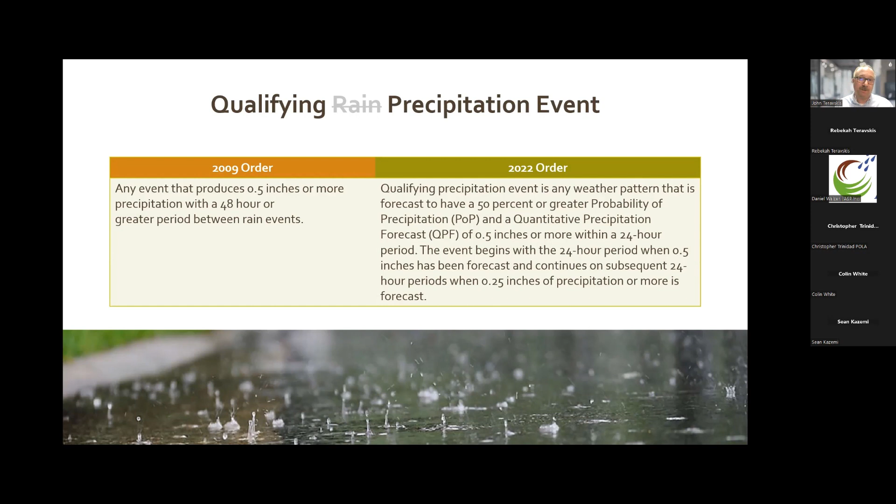Now, I had mentioned previously that in some ways, nothing changed with the monitoring program. And I'll illustrate that to you in a moment. But in other ways, everything changed. And the reason is because of this that you see on the screen, a change in the definition of a qualifying precipitation event. In fact, we kind of changed the term too, right? It used to be in the old permit called a qualifying rain event. Now it's called a qualifying precipitation event. I guess we saw last year that California can indeed get snow. So it's now called a qualifying precipitation event.

And in the 2009 order, you probably were real familiar with how to figure it out, right? You went out to the rain gauge, and if there was a ½ inch or more, then you had a qualifying event. Now, it wasn't in a single day. It was during a stretch of rainy weather that ended with 48 hours of dry weather. So whether it's 1 day or whether it's 30 days, until we get 48 hours of dry weather, the rain event doesn't end. And then we measure the accumulation of rain, and if it gets above 0.5, then it's a qualifying event. Now, that's not when the qualifying event begins. The qualifying event was the whole thing.

So you're having to anticipate a little bit, and you were having to look at some weather data to kind of take a best guess. Do you think it's going to be qualifying? And if it was qualifying, then you needed to be sampling each day of that event. And we'll see. I'm actually going to put the two permits side by side, and we'll work through some scenarios to see how that would play out.

Now, let's look at the 2022 definition of a qualifying precipitation event. It is any pattern that is forecast. Check that word out, forecast, to have a 50% or greater probability of precipitation, also known as a POP, and a quantitative precipitation forecast, QPF, of 0.5 inches or more within a 24-hour period. The event begins with a 24-hour period when 0.5 inches has been forecast and continues on subsequent 24-hour periods when 0.25 inches of precipitation or more is forecast.

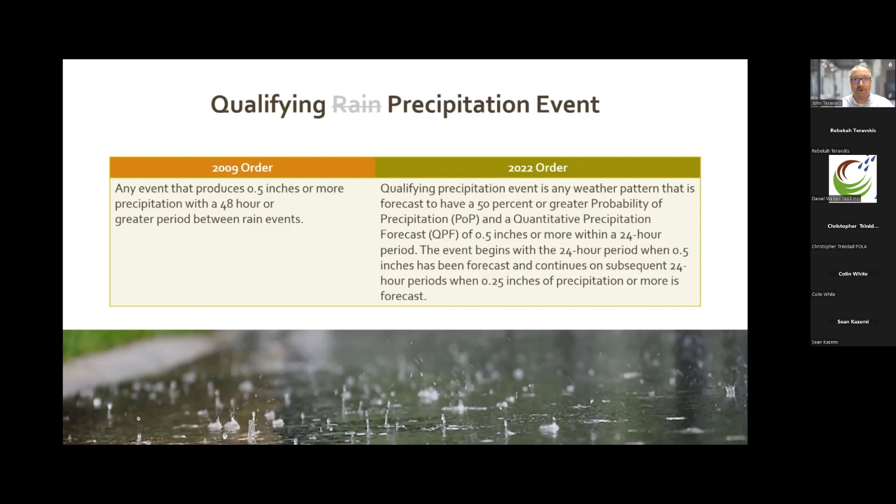So if you stop and think about this, and especially as you think about this longer and longer, it gets a little bit weird, a little bit strange. So now, when we're looking at a qualifying precipitation event, what's no longer relevant? How much rain fell, right? That's no longer relevant, how much rain actually falls. It's all forecast driven. Well, let's move forward.

When we started to teach on this permit and look at this permit, it was last December, and I actually took a real storm event that was passing through the Central California, Northern California area, and using the weather.gov forecasting tool, we took a look at this and we did this for a side-by-side comparison. So let's take a look at this weather event.

In fact, what I'm going to do is blow it up on your screen so you can see a little more of the detail. And so here you can see it's December 1st, 2022 is when this event was moving through. And we had right here in the brown line, the probability of precipitation. It gets a little crowded up here, but it reaches 93%. And then down here in these green bars, you can see the quantitative precipitation forecast or amount that's being forecasted.

And you can see in a 24-hour period, roughly 5 a.m. to roughly 5 a.m., we're expected to get 0.75 inches. So under the new construction general permit, is that a qualifying rain event? Well, yes, because you're above 50%, we're at 93%, and you're above half an inch in those 24 hours. So under the 2022 permit, yes, this is going to be a qualifying precipitation event.

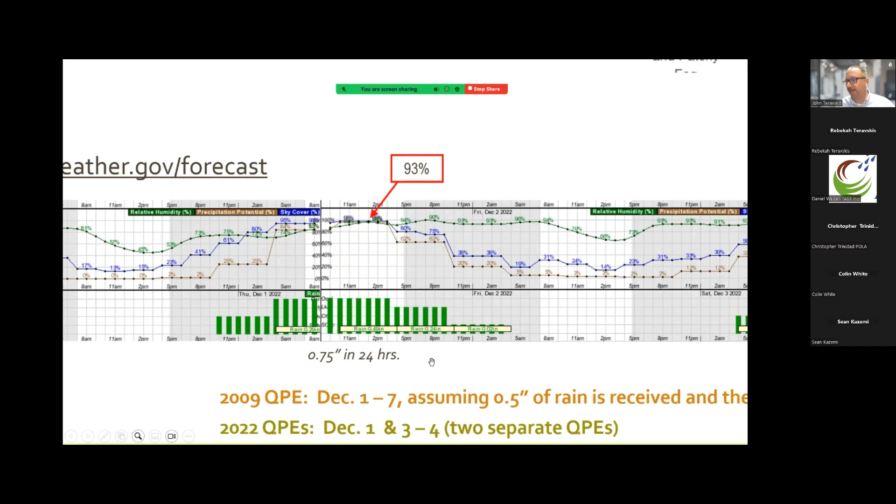And so now as we move through, that was Thursday, here's Friday, December 2nd, and what happens? Well, from 5 a.m. to roughly 5 a.m., it's dry. Nothing is forecasted. And again, we're going to assume that's actually what happened. So under the 2022 permit, what happens to our rain event? Well, the subsequent day, nothing's predicted. Remember, it's all forecast driven. To be qualifying for the next day, 0.25 inches, if you remember, had to be predicted. So in this case, nothing's predicted. The rain event ends with a single day for the 2022 permit.

But how about the 2009 permit? And remember, there's still a lot of sites that are going to be operating under this 2009 permit for the next 2 years until August 31st, 2025, or until they end, whichever comes first. So for the 09 permit, what terminated a rain event, according to that definition, was 48 hours of dry weather. Well, we haven't gotten that, right? We've got 24 hours of dry weather, but look at what happens on Saturday.

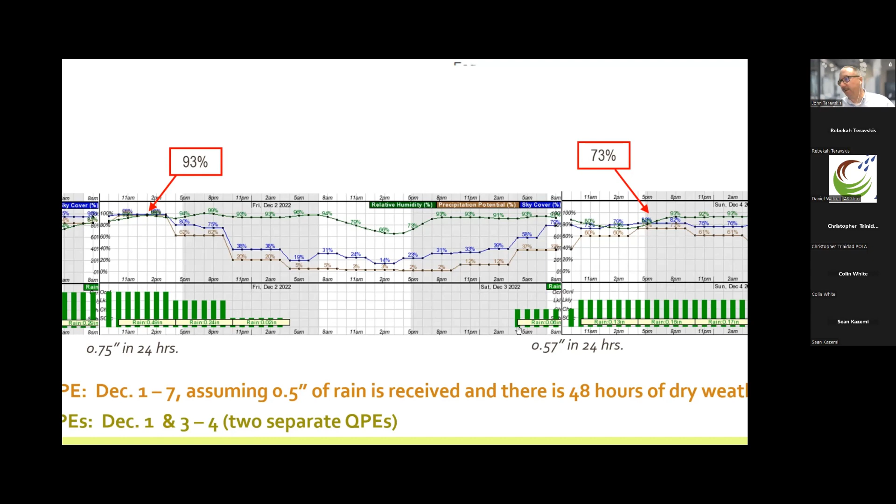In fact, I'll drag this over and we'll take a look. There's another little system moving through. And on Saturday, again, we're going to assume that the prediction is exactly what they got in the rain gauge. It's predicted for the first 24 hours that there's going to be 0.57 inches of rain. And the percentage is, again, above 50%. So under the 2022 permit, QPE number 2 has started. So we are in a second qualifying precipitation event.

Under the 09 permit, we are still in it. It never ended. We didn't get 48 hours of dry weather, and it's continuing. And so what happens is, that was Saturday, and then Sunday, we see about 0.22 here, 0.10 there. Well, that puts us above a 1/4 inch of predicted rainfall. So we're going to have a 2-day qualifying precipitation event under the 2022 permit.

And then comes Monday and the rain falls off. I don't show the rest of the graph here, but we're just going to assume the next several days are dry. And so that ends it finally for the 2009 permit, because we finally got 48 hours of dry weather. And because there's not 50% probability, or there's not 0.25 inches of rain predicted for Monday, the event ended under the 2022 permit in the early morning hours of Monday, December 5th.

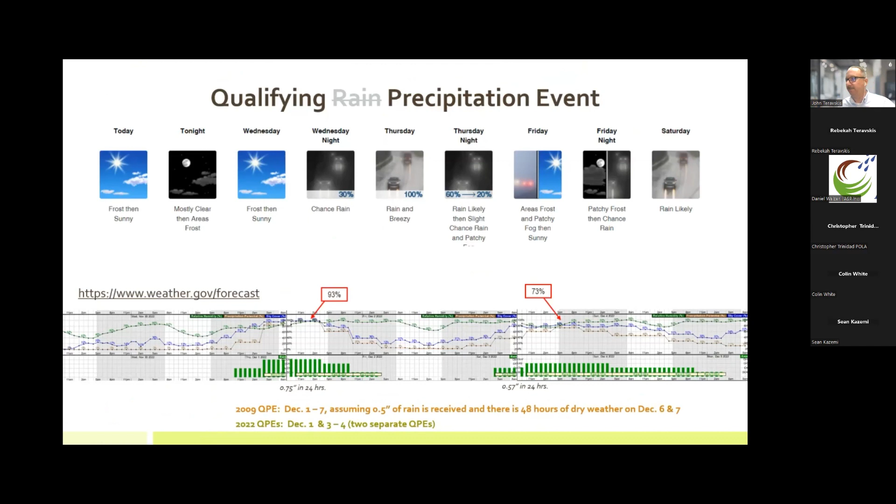So we'll take a look. We're going to use the same storm to look at how inspections would work, and also how monitoring sampling will work.

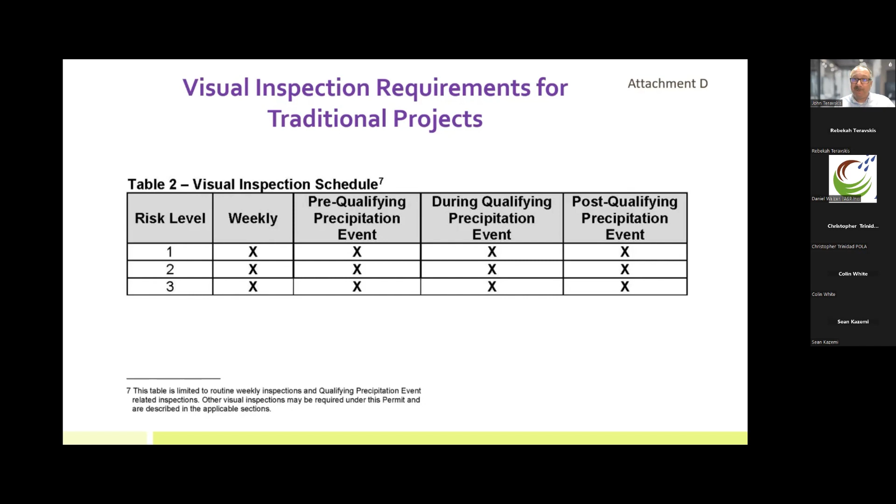So this is exactly what I mean. In some ways, nothing changed. We got the same inspections that are needed. Same inspections by definition. But in other ways, everything changed. So let's go through this in a little bit of detail here. So we still have the baseline inspections, and those are weeklies, and weeklies are weeklies. They really haven't changed. Pre-storm, so let's take a look at this.

This did change. So the 09 permit says you have to do a pre-storm within 2 business days prior to each qualifying event, with a rain event action plan required for risk level 2 and 3 projects. Okay, and that rain event action plan actually provided some definition as far as how we approached these pre-storms, because the pre-storm was really kind of needed. It was the intel needed to be able to actually fill out a rain event action plan.

And so the rain event action plan had to be prepared 48 hours before the rain event. It had to be physically in place in the contractor's hands 24 hours before the rain event. That way they have their punch list and they have time to address their punch list before the rain event comes in. So that rain event action plan helped define when a pre-storm should be done.

Now let's look at the new definition of a pre-storm under the 2022 permit. It says within 72 hours, or 120 hours if an extended forecast is available. And I'm not even quite sure why they put that parentheses in there, because it is, as far as I can tell, always available. But you are allowed up to 120 hours before the event, prior to any weather pattern that is forecast to have a 50% or greater chance of 0.5 inches or more in a 24-hour period.

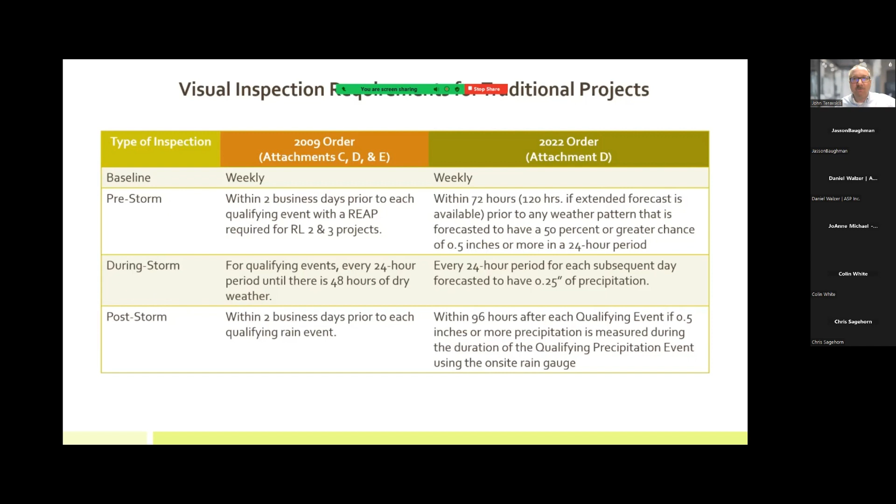Okay, but once the pre-storm starts, now we have during storms to do. Every 24-hour period for each subsequent day forecast to have 0.25 inches of precipitation is what's happening under the 2022 order. Under the old order, it started with the rain actually falling and us making some sort of judgment call. Do we think it's going to get above ½ inch or not? If we think it could, then we're probably out there every day doing the during storms. But under the new one, it's all forecast driven. And again, what is not relevant? How much rain actually fell. It's not relevant any longer.

Now let's look at post-storms. Post-storms under the 09 permit was you were doing these inspections within 2 business days after each qualifying rain event. So remember, the rain event doesn't end until you get 2 days of dry weather. And then you got 2 more days to do your post-storms. Now, I know a lot of us QSPs and QSDs, we kind of cheated the window there, right? Maybe we didn't wait a full 2 days after it stopped raining.

The next 24 hours, 48 hours, we're out there doing a post-storm. Technically, you're supposed to do it within 48 hours after that. The new permit says within 96 hours after each qualifying event, if 0.5 inches or more of precipitation is measured during the duration of the QPE in the rain gauge.

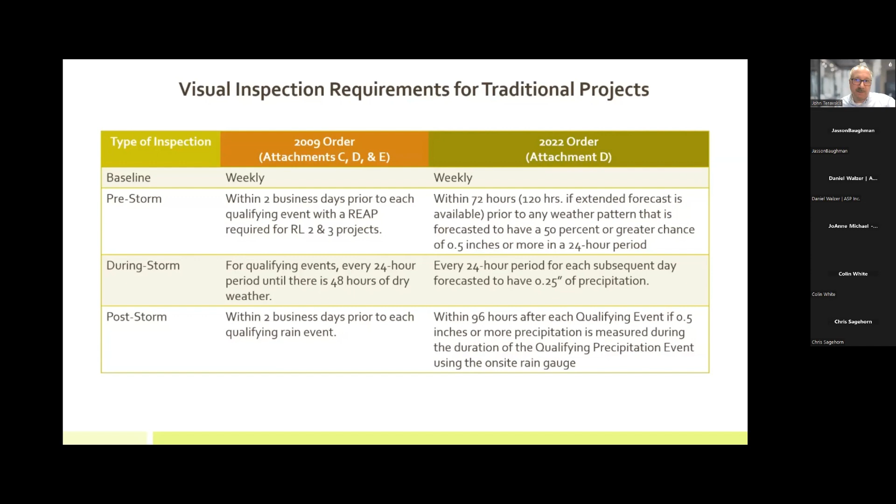So the rain gauge didn't lose their job after all, just a serious demotion. It still will be used to determine whether a post-storm inspection is needed or not. And the other job the rain gauge has is just FYI. It's one of the items that's required in the inspection checklist. You are to record the volume in the rain gauge. It's just basically FYI.

All right, let's go to our storm event and take a look at how this works out. So we showed you the 2 series of weather patterns coming through. And under the 09, remember, the event started here with the first rainfall falling. Now we have pre-storms to do, and again, I'll blow this up so we can look at this a little closer. So we could do our pre-storm event under the 09 permit as early as November 29th. And 48 hours before the event, it's coinciding with the REAP probably. And then pre-storms and weeklies can be combined and it's one inspection meeting both the requirements.

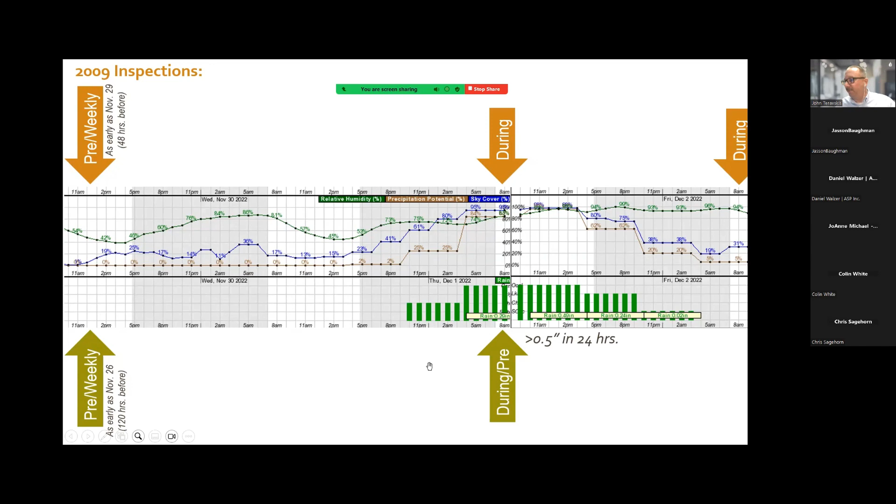That is also true of the 2022 permit. But we could, in this case, do it as early as November 26th. But should we? Well, I don't know. So as we move towards the event, then our during happens here. So the rain's falling, and we're doing it during because under 2022, the forecast goals have been met. But this during here can also, and probably will also, double as a pre for the next event we're keeping our eye on. But under the 09 permit, we're doing a during each day here. And so there's a during even in this 24-hour break.

Now, here comes the weekend. For the weekend, chances are very good that that's going to be exempt under both permits, and we'll see the exemptions allowed under the new permit. But during non-business hours, you do not need to do inspections or monitoring. So if you're a Monday through Friday operation, then very possibly it's going to be exempt on Saturday and Sunday. You're not going to need to do durings. Now, if you're a 7-day-a-week operation, then yes, you're going to have to do durings under both permits during Saturday and Sunday. And then after the weekend, we'll keep doing durings technically until December 7th under the 09 permit. And then by December 9th, we need to do our post-storm event.

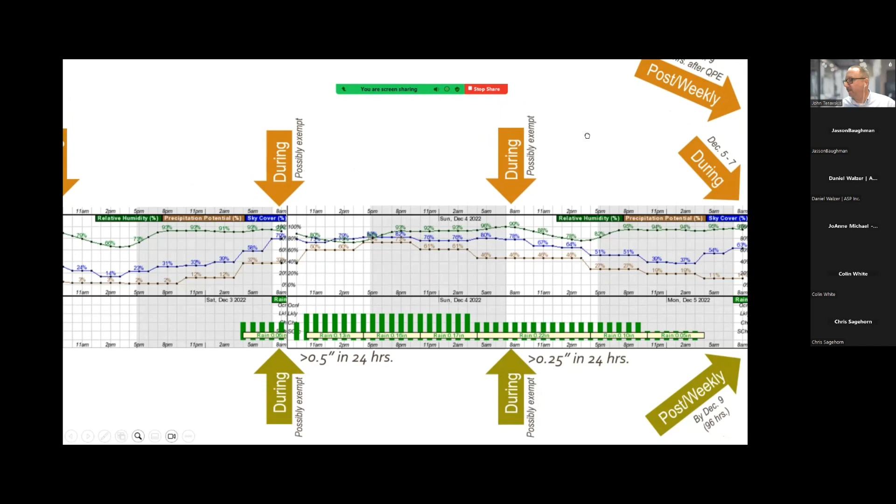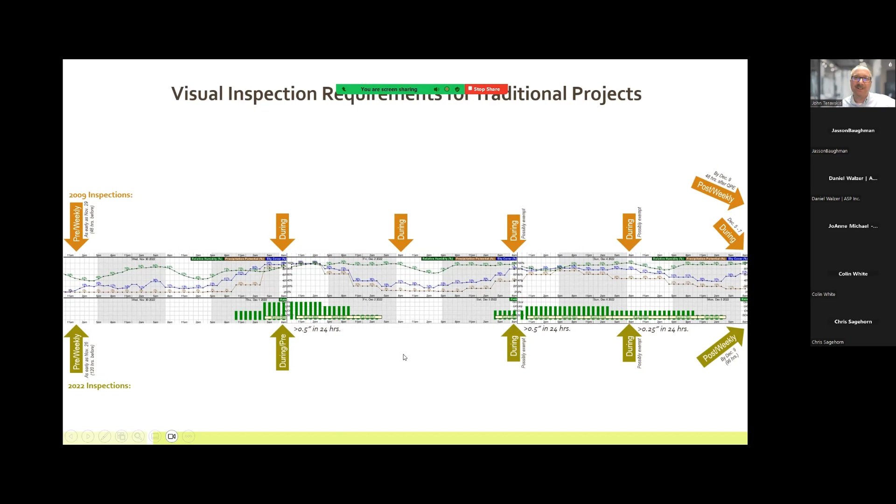Now, under the new permit, we do our during only on Sunday, and that's assuming we're a 7-day-a-week operation. And then we do our post by December 9th as well. Notice same date, actually. But the hours that were allowed are different for that. So if I zoom out here, you will notice which permit has less inspections. And if you count up the arrows, you go, oh, 2022 has less inspections. Well, that might be one indication that maybe the new permit's a little less expensive. No, probably not. And the reason is because of yesterday. Remember who else is having to go out in the field? The QSD. They also need to be out there. So some savings in inspections here, but you're going to see some new additional ones you didn't have before.

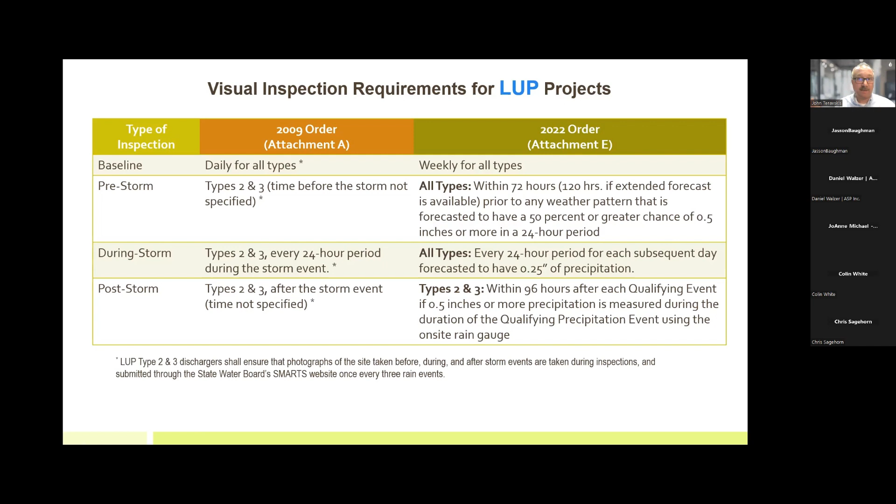So, all right, let's take a look at LUPs. LUP inspections change, and I applaud this change. This is a great change. The 2009 permit said, look, you got to do dailies for LUPs for all types. But then it had this strange clause in, but you don't have to document it. And I don't know who doesn't document an inspection, but it said you didn't have to. Now they've switched all that so it mirrors the traditionals. It's identical to the traditionals. And I think that was a great change, actually. So you don't have to remember two different monitoring programs for LUPs and traditionals.

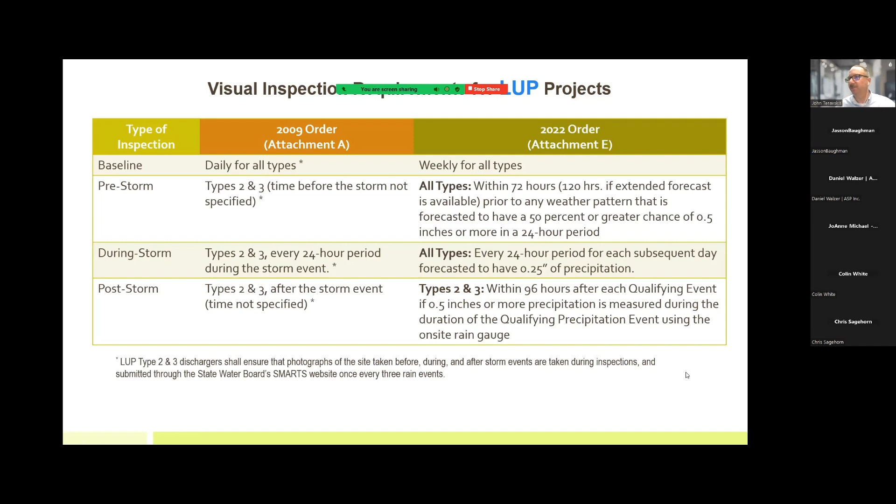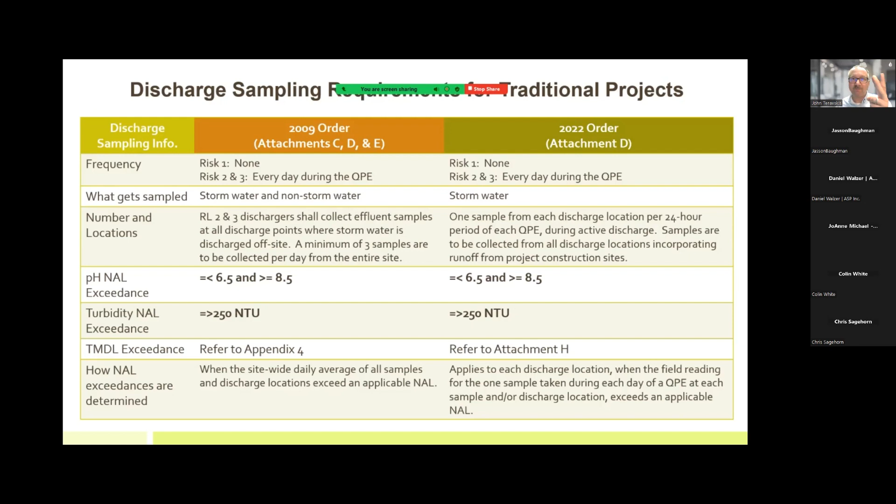So if we had 1 discharge point under the 09 permit, that had to be sampled 3 times. Under the 2022 permit, it has to be sampled once. If we have two discharge points under the 09 permit, one of them is sampled once and the other sampled twice. Under the 2022 permit, each one is sampled once. And if we have 3 discharge points or more, under the 09 permit, each one is sampled once. Under the 2022 permit, each one is sampled once. So a little bit of a change there.

The NALs did not change, at least as far as numbers are concerned. pH is still 6.5 and 8.5, and turbidity is still 250. On Friday, we'll talk about TMDLs, so we'll just skip over that for right now.

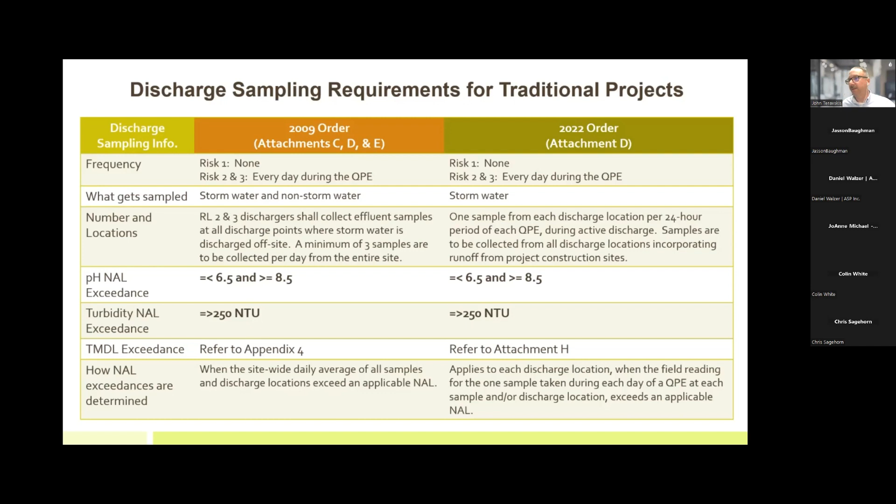But a significant change in this permit is how NAL exceedances are determined. Under the 09 permit, when the site-wide daily average of all samples and discharge locations exceeds the applicable NAL, that is when it is exceeded. But under the 2022 permit, it applies to each discharge location on its own merits. Let's take a look at an example. Right over here.

So here's very typical sampling results, 5 discharge points. Under the 09 permit, we look at it: number 1 is 7.8, 35, really good numbers. Number 2 is 7.9 for pH and 125 for turbidity, good numbers. Number 3, a bit high, 8.8, 275. Very realistic numbers, not horrible, a bit high. Number 4, very decent again, 7.2 and 65. And number 5, 8.6 and 325. Again, a bit high, but not horrible.

But if we average all those up under the 09 permit, it's an average of 8.06 for pH and an average of 165 for turbidity. Both under their NALs, very acceptable numbers. This would be a good data set. We would say this site is performing well. Maybe we could throw some extra BMPs at number 3 and number 5, but they're doing well. Under the new permit, though, we had an exceedance there, there, there, and there. We went from 0 NAL exceedances to 4 NAL exceedances.

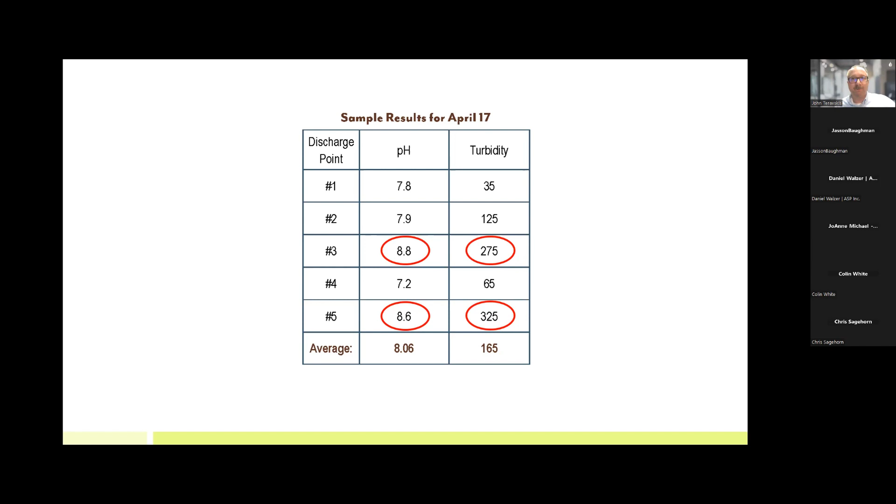So what's that mean? Well, guess who's going into the field? If you were with us yesterday, you know. 2 people, the QSD and the QSP. Both are going out into the field within 14 calendar days of this exceedance. So do you think we'll have more NAL exceedances? Yeah, I think we will. And I think that QSD better get not just work boots, but maybe some rubber boots. They're going to be going into the field quite a bit.

All right, let's look at sampling now, same storm event, and when we need to sample. Under the 09 permit, we need to sample every day there is a discharge. One of the rules is if there's no discharge, you don't sample, and that's still true. But we need to be out there and ready to sample every day during the qualifying rain event. For this example, that's at least Thursday and Friday. Saturday and Sunday may be exempt. And then possibly Monday or Tuesday if there's a lingering discharge, depending on your site.

But under the 2022 permit, you are going to be sampling the first day of that first storm event on Thursday. And then if you're a 7-day-a-week site, you may be sampling on Saturday and Sunday, but not on any of the other days. Again, remember what's not relevant in this is whether it's raining or not.

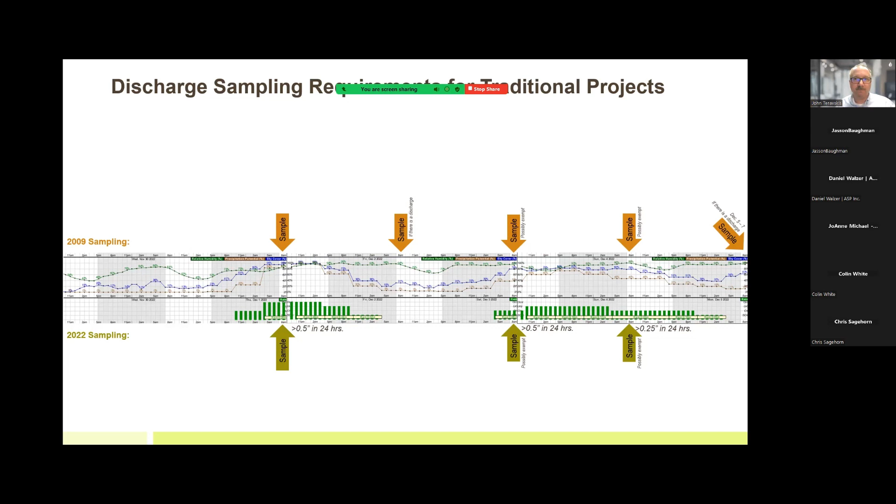It's all forecast driven. So whether it's raining or not, there may be nothing to sample. But that's not too different than what we see now, because lots of times, even though it's technically a sampling day, you're not required to sample outside of business hours. The rain events often come in at night or after 3:30 in the afternoon when the project is over.

There's many times, in a typical pattern like this with 5 potential sample days under the 09 permit, we might get 1 or 2 out of that whole time where we can actually get a sample. So I don't know if we're going to see any real difference in the number of samples being collected. We'll have to just see how that works out.

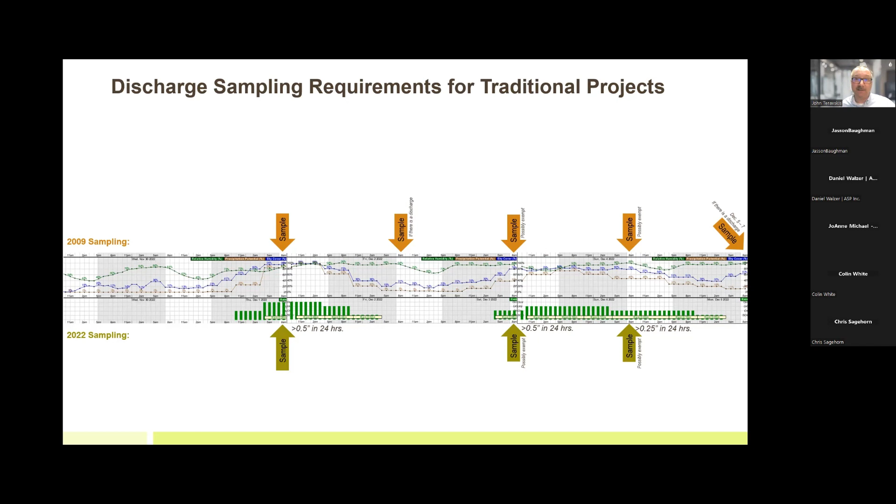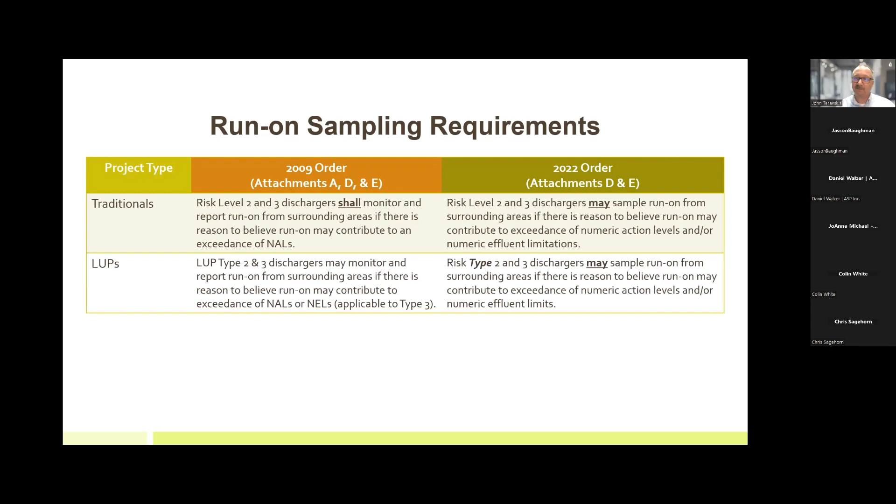LUPs, it hasn't changed. It's the same as it was before. Run-on sampling, slight wording change. It changed it from shall for traditionals to may. Now, I will say, if you do have run-on happening and it's causing NAL exceedances, not only may you sample, you should sample it. If the neighboring property is causing you to exceed NALs for turbidity, you definitely want to sample that. So receiving water sampling really didn't change a whole lot, cleaned up the language and the formatting a little bit, but it really didn't change a whole lot.

Now, non-visible pollutant sampling, that changed a bit. And so I used to teach in my classes 2 and 2. Remember 2 and 2, that you got to collect non-visible sample within 2 hours of the discharge at 2 locations. I guess I got to change my teaching technique to now 1/8. Remember 1/8. I like to give my students memory hooks. Why 1/8? Well, you only need 1 sample now, and now you got 8 hours to collect it in.

Now, there are some really good things about what the Water Board did with this. So first off, non-visible pollutant sampling is the oldest of all requirements. It actually even predates the 2009 permit. It was in the previous permit before that. It's been around for a long time, and I think it's here to stay.

Under Roman numeral 3D3B, it says dischargers are required to conduct sampling and analysis for non-visible pollutants identified in the SWPPP or otherwise known to be on site only when the pollutants may be discharged due to a failure to implement BMPs, a container spill or leak, or BMP breach, failure, or malfunction. So it's really important to remember the trigger for that. And then it says you have to collect it within 8 hours of a discharge at the down gradient discharge point from that upset, whatever happened, porta potty blowing over.

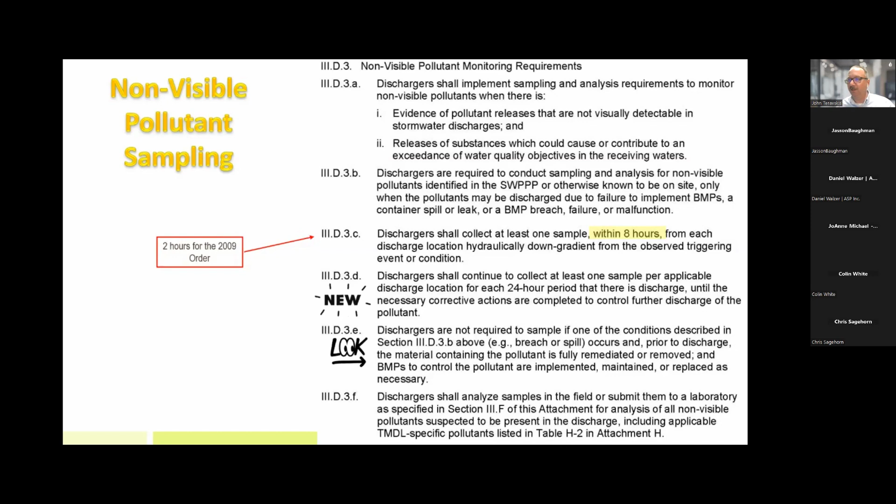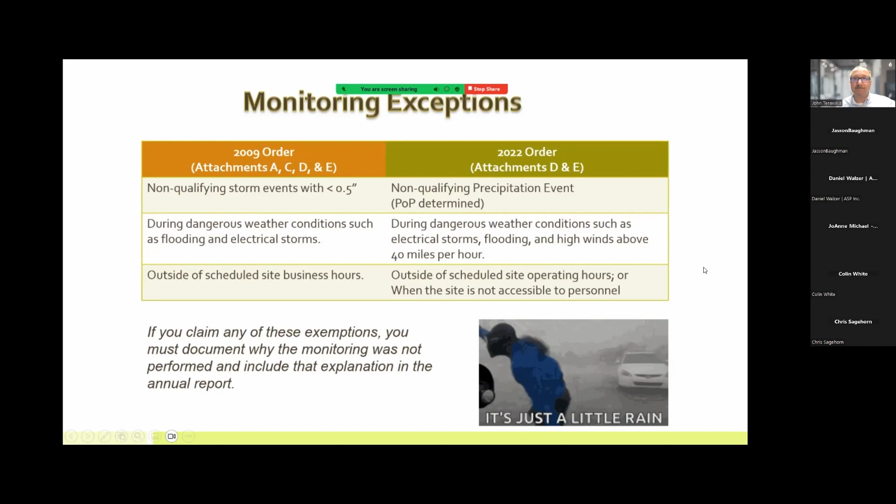One other monitoring or kind of a permitting scenario here where monitoring can be reduced is for periods of inactivity. This is also a good new change in the construction general permit, because we were always asked, well, we're having to shut down the site, maybe because there's endangered species potentially present, snow, whatever. There were various reasons. And now you can do that under the 2022 permit. You do it through the change of information process.

It starts with a QSD revising the SWPPP to show what is going to be the new configuration of BMPs during this period of inactivity, with photographs of those BMPs installed. And so you upload that onto SMARTS as a part of the COI. And once it's approved, then here's what can happen under Roman numeral III.G.2. It says, first off, all sampling may be suspended. All right, so right there, we got some relief. That's cool. And monitoring inspections may be reduced as follows.

So G.2.a says a QSD shall visit the site within 14 days of that approval of the COI, I guess basically to check it out, make sure that the BMPs specified for this period of inactivity are installed correctly and the site is ready. Then G.2.b says a QSP or trained delegate shall visually inspect the inactive project at least once every calendar month and prior to any weather pattern that is forecast to have 50% or greater chance of 0.5 inches or more in a 24-hour period.

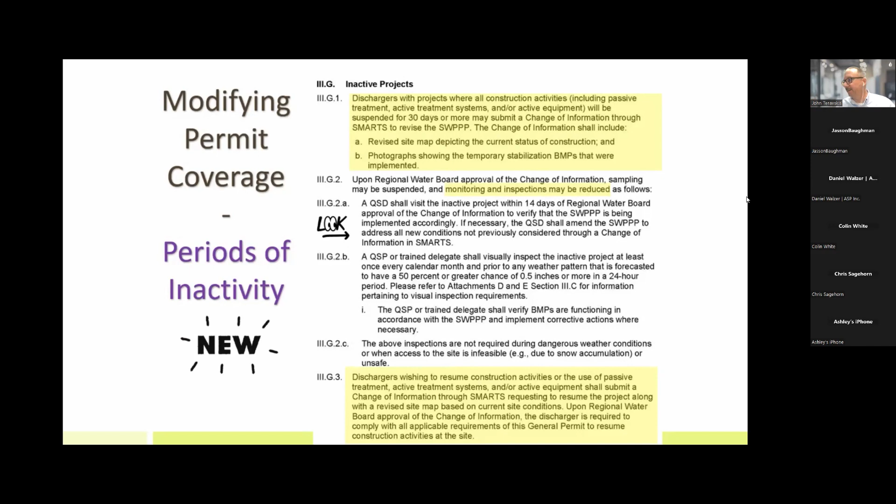So you have to do this pre-forecast rain event inspection. And then the QSP or trained delegate shall verify the BMPs are functioning as needed. Of course, if it's dangerous conditions like deep snow, ice, etc., you don't have to do it. And then to reverse this whole thing, go through the COI process again. Amend the SWPPP for BMPs now for the active process and get that COI approved on SMARTS. So that is periods of inactivity.

All right, and whose job is it? Well, here's a list under the 2009 and 2022 order. We're comparing these. Weeklies can be done by anyone. However, under the 2022, the QSP has to do at least one a month. Now, that doesn't mean it has to be a weekly. They have to visit the site once a month. It could be for another reason, NAL exceedance, pre-storm, during storm; well, they're going to do pre-storms. So pre-storms, under the 09, that could be anybody. Under the 2022, it's a QSP's job.

Now, a QSD may do the job of a QSP. Yesterday, we talked about when that is acceptable and about being named as the QSP or alternate QSP in the SWPPP. So listen to yesterday's broadcast if you missed out on that. But ultimately, it is a QSP's job to do it. A delegated inspector cannot do the pre-storms.

REAPs: it's the QSP's job under the 2009, and those projects that are still under the 2009 will still be doing REAPs until potentially August 31st, 2025. Under 2022, no need to do it. No REAPs. They say they went away, but did they? Pre-storms sound an awful lot like the old REAPs, don't they?

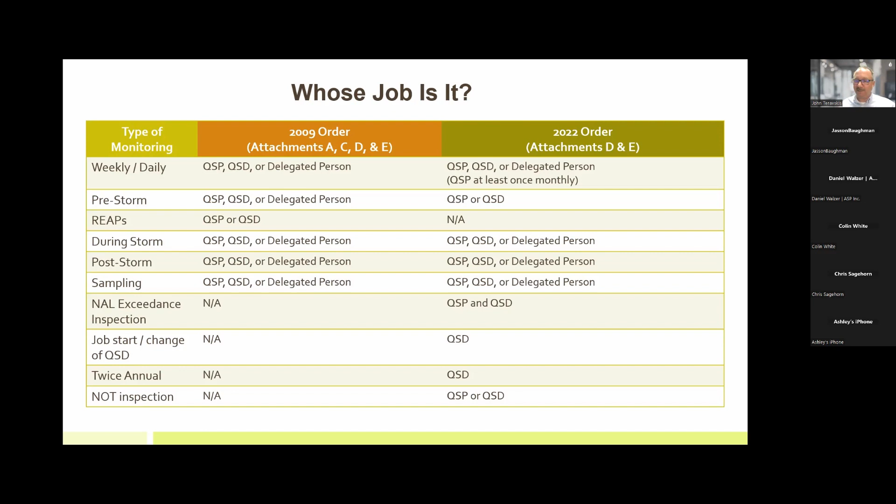All right, well, let's take some questions here. And I probably have a few here. So, 20. I don't know if we'll get to them all, but all right.

It's going to be very difficult for inspectors to know which inspection program they're under. And one of the key things is to know what permit is this site under. That's going to be really, really tricky.

Can the quarterly count towards the weekly as well? Yes, of course. Under the 2009 permit, yes. In fact, the hardest thing about the quarterly was remembering to do it. And so at least for our inspections, we always built the quarterly inspection elements into our weeklies. That way we never forgot it. And it only took a few moments to do it anyways. All right. Let's see, a quarterly is just a visit. Yeah. Let's see.

How often are you to check the forecast? And what if a change happens after business hours that day? Well, I think I was kind of addressing that with some of my scenarios, but we're still scratching our heads trying to figure out how we are actually going to balance those four concerns I talked about. Remember, the philosophical, the compliance, the logistical, and the business. How are we going to balance that? We're going to have to work that out.

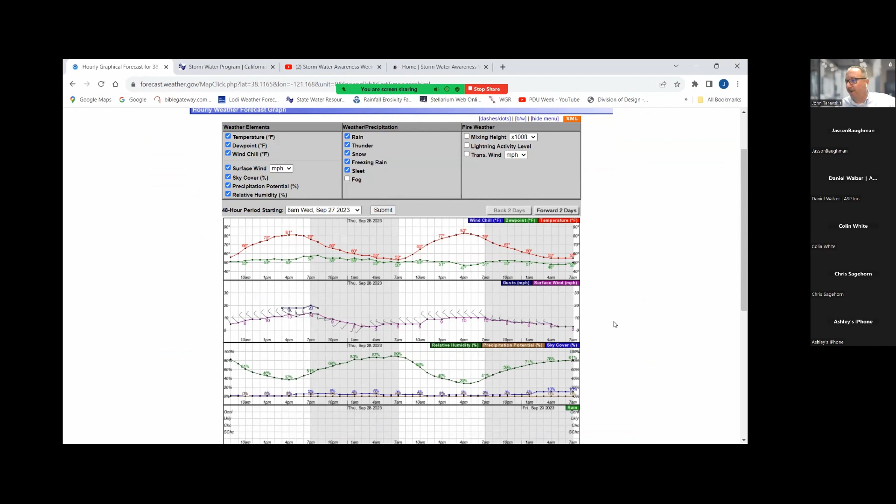To me, storms aren't on a table. They're on a bell curve. And so, storms ramp up to an apex and then diminish. And that's how I prefer to look at it from a graphical viewpoint. But that's the website you need to go to. Thank you for the definition of forecasted precipitation event.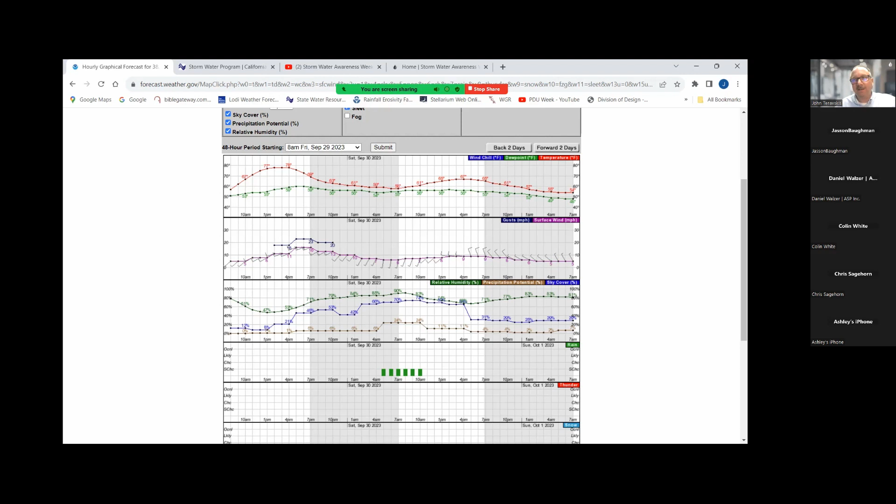In fact, I was showing here our podcast series. I am planning to come out with a podcast just on these, what I call the 4 storm events of the new construction general permit. Probably would have made a good Stormwater Awareness Week workshop, huh?